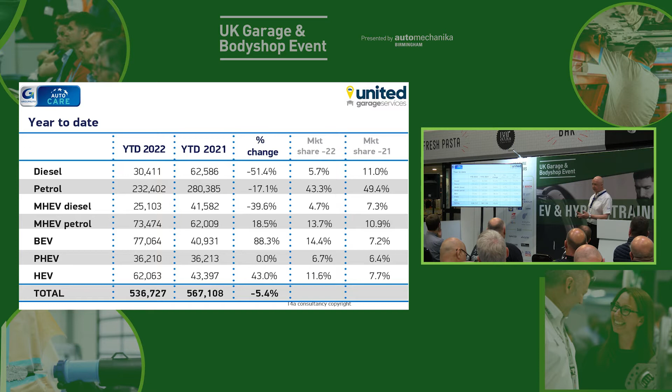This is a fundamental change to the entire industry, and a lot of people may not make it. Looking at some car sales in the UK, this is the latest month, ending May. Diesel sales are down 50% on the month - they now only represent 5% of all new cars registered. Whereas EV is now up 88%, and 15% of all cars registered are now just purely electric vehicles. That is a fundamental change, and you can see how that will probably continue to accelerate as time goes forward.

Norway, as you may know, is going to ban the sales of combustion vehicles from 2025, the first country within Europe to do so. A lot of other European countries are going to do it in 2027, and the majority, along with ourselves, are going to do it in 2030. But if you look at Norway, we can use them as a gauge of what's happening, and you can see the decline in the various combustion vehicles. The black line is diesels, and you can see that's collapsed quite dramatically down to pretty much zero, and if you look at our analogy, we're not far behind that really. The white line is the collapse in petrol combustion vehicles, and I think we will see that in the coming years in the UK market.

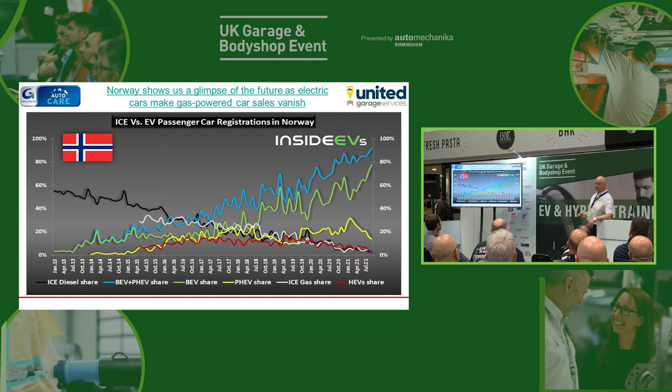Interestingly, the red line is hybrids. Now again, like most European countries, hybrids will be banned along with combustion vehicle bans as well, so 2025, 2027 or 2030, and you can see that market's completely collapsed in Norway too. So straight away with that, no disrespect to them, but you think to yourself, what is the market for Toyota in Norway now? And the answer is they don't have one. Someone like Toyota, one of the largest vehicle manufacturers in the world, actually don't have a market in Norway.

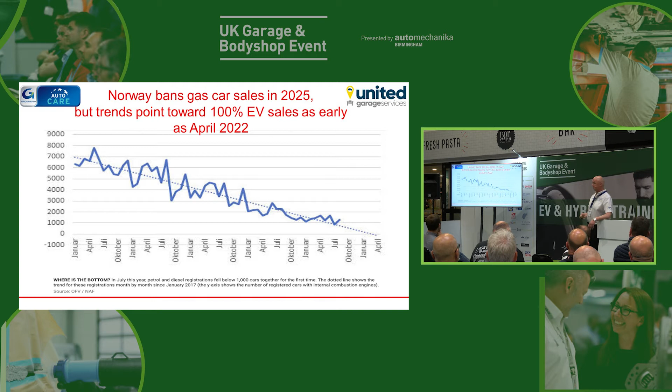Even though the actual ban by the government will be 2025, the reality is they're fast approaching it now. The prediction is, as we speak, they may have actually hit the point where they are no longer selling any new combustion vehicles. So it could be 2.5 years ahead of the actual date, just through natural progression. Things are moving very, very fast.

A lot of companies are going into the EV route for political reasons, environmental reasons, and obviously tax benefits. As an example, Asda have all now gone to electric vehicles and will change the fleet entirely. I'm sure other companies are looking at it as well. So if you are involved in any fleet work, bear that in mind. You may not have to wait for your customers to get EV vehicles - it may be a big fleet contract that could go to EV very quickly.

Bridgestone, we do some training for them, and they've done a survey through YouGov, and of all their customers, 67% said they're going to go EV. So nearly 7 out of 10 of their customers, of a 2,000 survey poll, said they're going to go EV. And the other thing that's interesting is about 50% want more information.

So you as a garage owner or a business owner, you need to know this so you can convey that to your customers. If nothing else, just give them an understanding that you do know what's happening out there, rather than just saying 'well, I don't know really.' You actually know what's happening and what is the reality, what is the truth. Because there are so many misconceptions and misunderstandings about what actually is going on with EVs themselves.

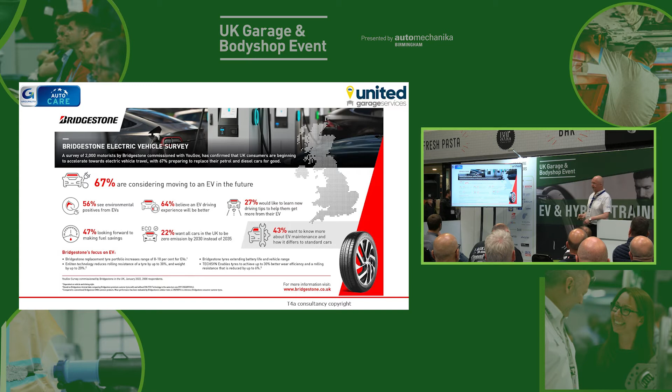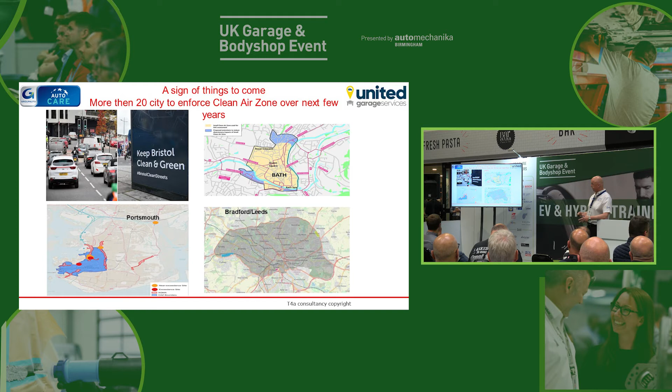Obviously, every city around the country now is getting some sort of emission zone. Bristol, Bath, Portsmouth, Bradford, Birmingham, London - we've got emission zones coming around. I think there's over 20 cities that are going to have some sort of emission zone in the next year or so. Only this week, Edinburgh, Glasgow, Dundee, several Scottish cities have put in emission zones. So that will continue to roll, and it will continue to have an impact on your customers and what cars they look for in the future.

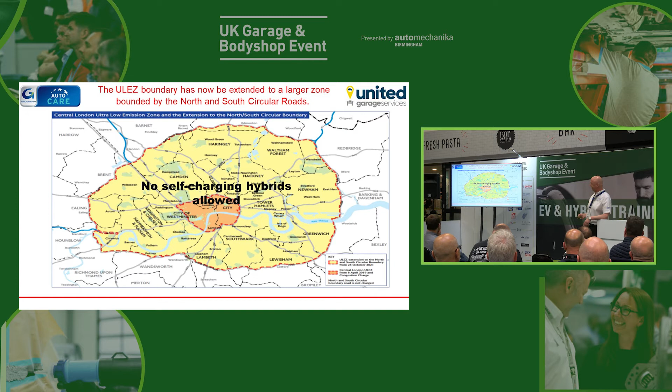Obviously, London, we've now got emission zones and congestion zones as well. If you've got a non-compliant vehicle, to get into the centre part now will cost you the best part of £30 a day, every day. Obviously, no hybrids now, so even a ubiquitous Prius has got to pay to get in the middle bit. The only vehicles in that orange section, of course, are just EVs.

As an industry, I think possibly we've taken our eye off this subject. Obviously, we're aware of Euro 4, Euro 5, and of course Euro 6. And then the EV thing seems to have muddied the water. But in the background, we still have stuff going on, and that is Euro 7.

Euro 7 will start from 2025. Now, I know we've left Europe, but we are still going to continue with the same emission targets just to make selling vehicles that much easier within the UK. So Euro 7 is a thing. The problem with Euro 7 is the requirements to meet it. Now, it has almost been finalised, and those emission standards are unbelievable. We'll have a little brief look at them in a moment.

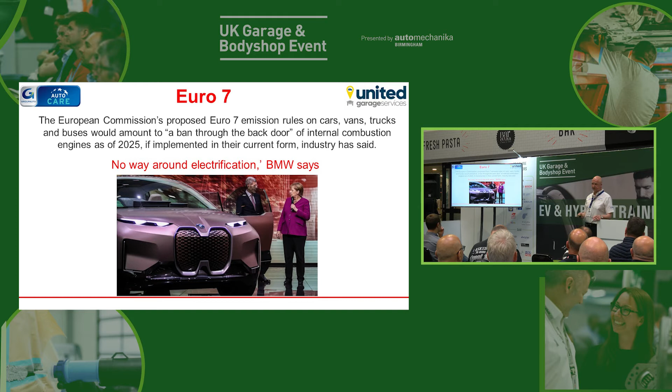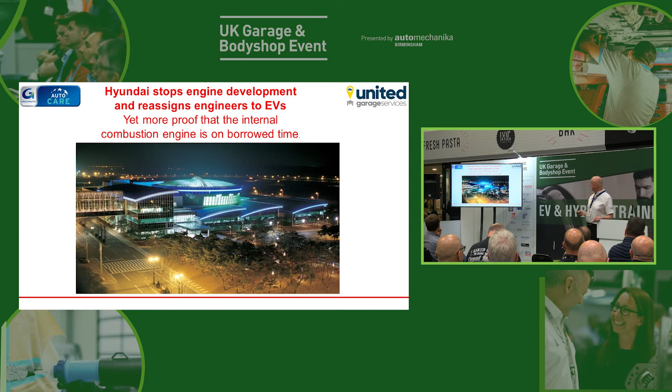But basically, a lot of vehicle manufacturers are of the conclusion that effectively Euro 7 is electrification through the back door. That's what BMW say - they say to meet Euro 7, you might as well just go electric, because that will be easier than meeting Euro 7. Hyundai have stopped all combustion development for Europe because of Euro 7. Nissan have stopped all combustion development because of Euro 7. So Euro 7 is a big, big problem that I think, again, we've not acknowledged the significance of.

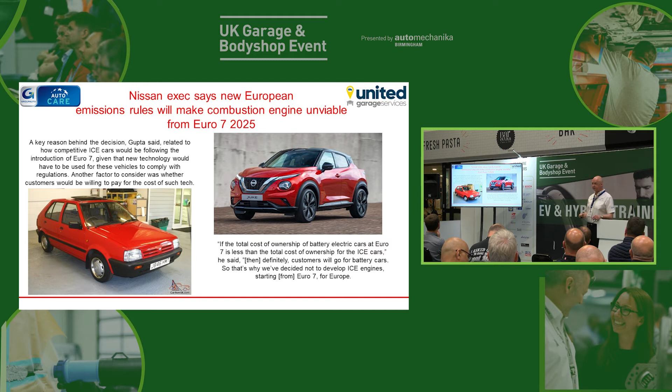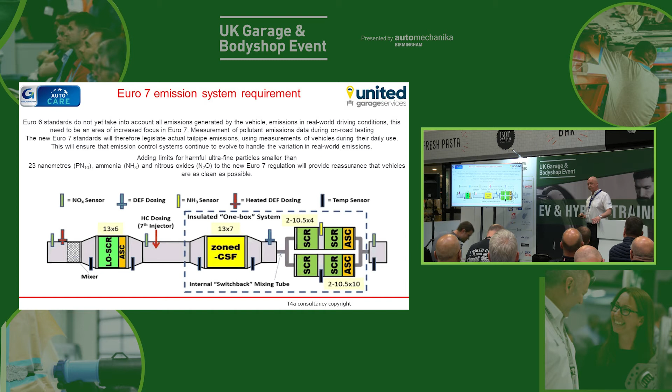From a manufacturing perspective, the biggest issue is the vehicle manufacturer will have to guarantee that for 150,000 miles, which then makes the car uneconomic. And that's what they're saying - yes, it is possible we may be able to meet Euro 7, but at what cost, and is it worth it? The conclusion is, it's not. So most vehicle manufacturers, which I'm sure you've seen recently, are launching their last combustion vehicles as we speak, which will remain Euro 6, and they can sell that vehicle for about 18 months after the 2025 date, but only as a Euro 6 vehicle. They just won't bother trying to do Euro 7.

Obviously time has been spent by my associate, Mr. Denton, about the requirements for electric vehicle training. I won't bore you with too much detail on that because of time, but interestingly, this has started this year.

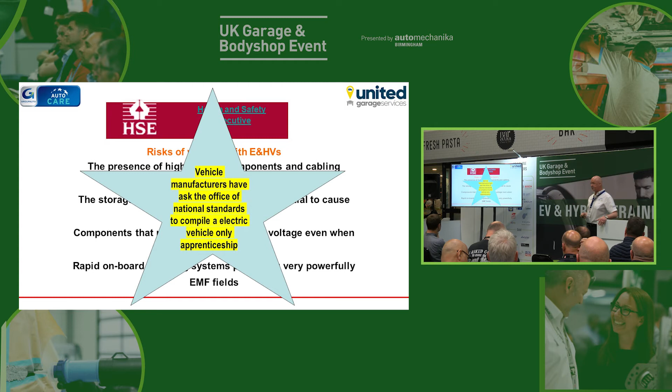Vehicle manufacturers are now providing electric vehicle only apprenticeships. We've seen the adverts running in London now. So vehicle manufacturers have concluded they do not need any more mechanically qualified technicians. They're going for electric vehicle only technicians. If nothing else tells you about changing times, that should. In their opinion, they've got enough mechanical technicians to cover what they need, but what they need in abundance are just pure EV technicians.

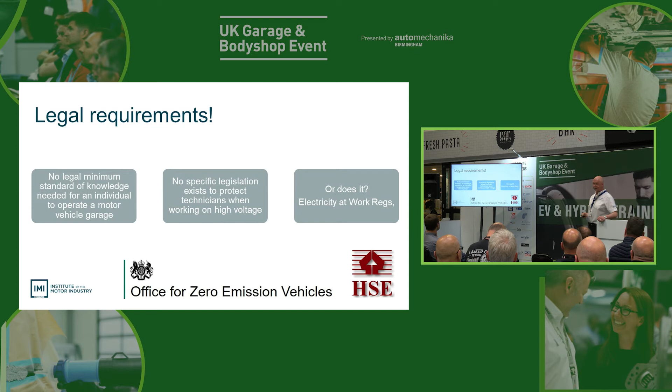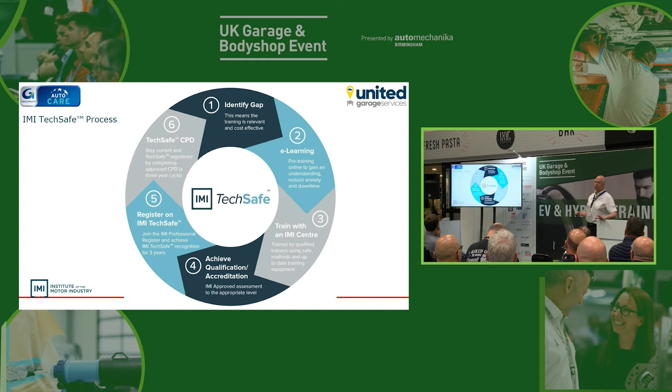Obviously, we know there's a requirement through the Electricity at Work Regulations, so there is a legal requirement, if we've not had time to discuss that. Once that's all completed, there is a further requirement to maintain that qualification, known as TechSafe, a bit like the Corgi gas register, that sort of thing, but we can discuss that at a later stage.

Looking at a few facts and fiction. Obviously our vehicles have got a 12-volt battery, and you know that can be an easy thing - I don't need to be qualified to change a 12-volt battery, I can just change it. First of all, you might see that our 12-volt batteries are recharged from what's known as a DC to DC converter, which receives its power from the main high-voltage battery. So there is a health and safety risk with that.

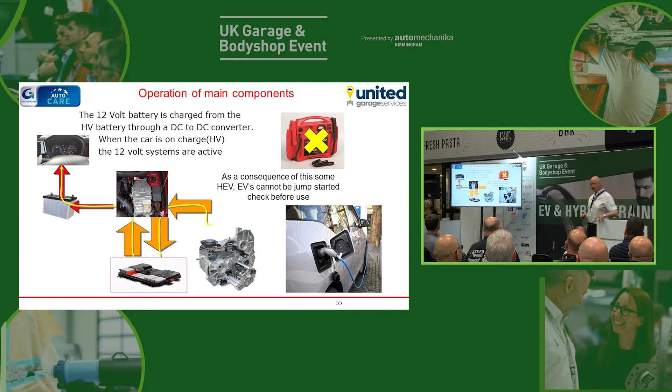But vehicle manufacturers are looking for the next game. So what have we done? Hyundai and Kia - you've now got no 12-volt battery anymore. The 12-volt battery is gone, and what you've got is a proportion of the high-voltage battery acting as the 12-volt battery. So to replace the 12-volt battery on that vehicle, what's got to come out? The main high-voltage battery. So whatever you do, don't try and jump-start that car, because it can be awfully expensive.

And don't get the apprentice to try and find the 12-volt battery - that's not very nice, is it? Because they'll be on it all day and still won't find it. But that just shows you things are changing and how quick things are changing.

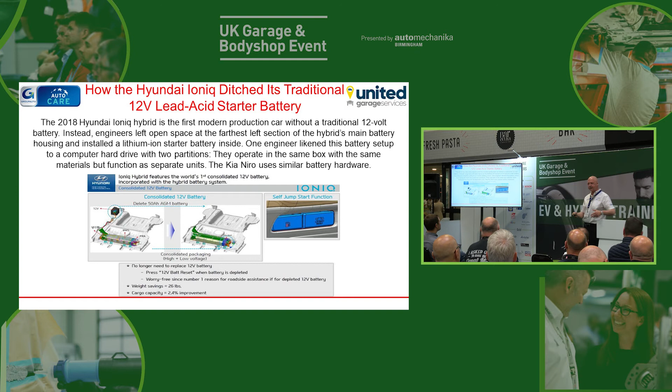Another thing, no disrespect, but it's something I came across because I had to do some help. Obviously companies are now concerned about the exposure they're going to put their employees against. Someone like Kwik Fit - I don't know if you can see it from this distance, but I can read it to you. This was on my old Outlander plug-in hybrid, and it says Kwik Fit do have batteries for an Outlander, but below it says we currently cannot fit batteries to an EV or plug-in hybrid vehicle.

That is someone like Kwik Fit telling you on their own worldwide website that we cannot fit, we are not allowed at the moment, or are unable to fit your 12-volt battery. What confidence would that give your customer if you said, yeah, I can work on a car, but I can't change the 12-volt battery? Anybody's going to think, well, that's pretty straightforward - we know it's not, but you'd expect they could do it. But they can't. They cannot replace a 12-volt battery on an EV or plug-in hybrid vehicle.

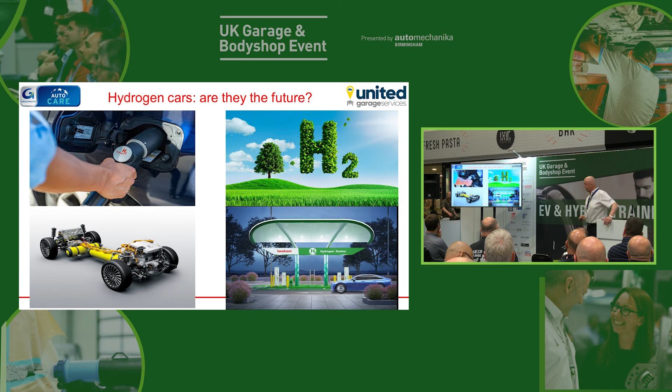Again, is hydrogen going to be the future? A few people have come on our stand already and said, well, it won't be battery electric, it'll be hydrogen. We get that all the time, and I've put a few things up there. So is hydrogen going to be the future? We've all got our own opinion, but let's look at the facts.

I think this is where we get a little confused again. Hydrogen may well be the most abundant element in the universe, but on planet Earth, we don't have any. All the hydrogen on planet Earth is contained within something else, either the oceans or hydrocarbon fuel. There's no ready available source of hydrogen we can tap into - we have to manufacture it.

Why is the reason we've only got 5% made through electrolysis? One simple fact: economy. To make 1 kilo of hydrogen from water, electrolyzing it, will require 49 kilowatt hours of electricity. That 1 kilo of hydrogen will get you about 60 odd miles. 49 kilowatts will get you 250.

So basically, you can go home and do the research, but when you're looking at energy, what you want to look at is something known as EROI, energy return on investment. How much energy you've put in to what you're going to get out. Clearly, all energy wants a positive. You put 1 in, you get 10 out. That is how most energy works, some with a higher figure than others.

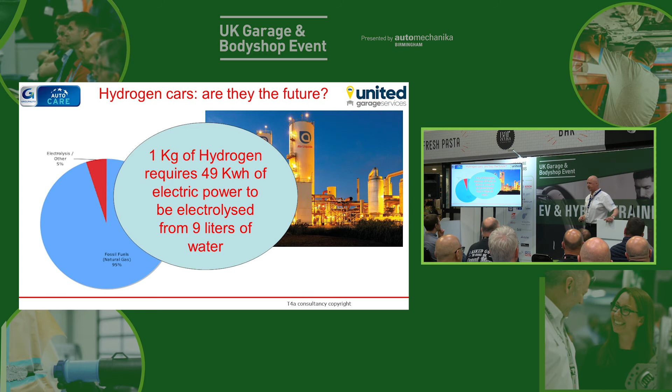I think to some degree, when I hear people talk about it, I think they just think hydrogen fuel cell sounds sexy. It sounds Buck Rogers, 21st century. A battery sounds like Benny Hill, Fred Flintstone, doesn't it? It's a milk float. Doesn't sound sexy. Hydrogen fuel cell sounds sexy. The mayor at Montpellier decided he was going to have a hydrogen bus service because it sounds sexy.

By the time he crunched the numbers, his hydrogen bus service would be 6 times dearer than an EV bus service. So guess what? He scrapped the hydrogen bus service and bought 54 electric buses.

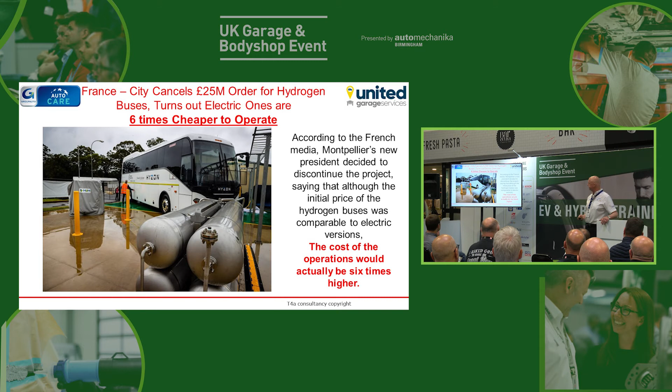We run the same 100 kilowatts through the national grid and charge an EV vehicle. We've now got 73 kilowatts at the wheel of the vehicle. A 3-to-1 advantage. When is that hydrogen ever going to get near that EV efficiency? Never. The answer is never.

And that's why currently the only car you can buy... Honda's binned their Clarity, so Honda are out. Hyundai has suspended until further notice their development of the Nexo. And the only one, of course, is Toyota with their Mirai. But in order to have a Mirai, you have to live inside the M25 because it's the only place you've got hydrogen stations.

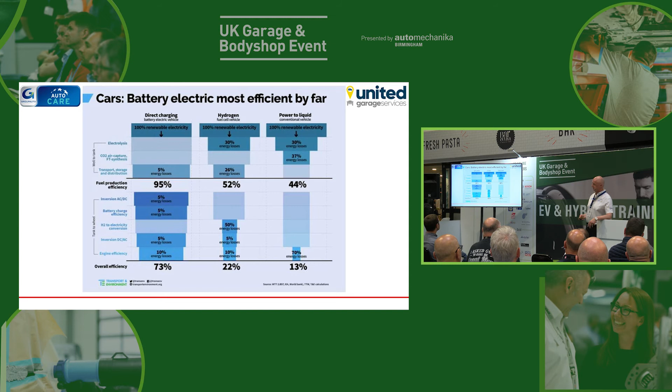Charging stations, courtesy of ZapMap. Back in 2016, which was the first year I started running electric vehicles, there were 6,500 stations. The majority of those stations would only have one cable. So that was 6,500 stations, and it was almost certainly 6,500 leads, or 6,500 charging points.

That was 2016. If we now come on 6 years, how many do you reckon there are now? Most of those stations have got 2 leads now. So the change in the charging structure network has been astronomical.

Unless you do it, you won't realise it. I go to Scotland, I go to Northern Ireland, I go all around the UK, 20, 30,000 miles a year. I've never, ever, ever had a problem. And when I read in the press that somebody takes 9 hours to do 100 miles in a car, you think, well, they're just an idiot.

There's nothing wrong with it, they just don't know what they're doing, because it's almost impossible to have that problem. I drove yesterday, I was teaching in Whitstable, and I had to come up here to put the car in the stand. I left Whitstable at 3:30 with a fully charged battery. I drove all the way from Whitstable to the NEC, 190 miles, and I've still got 130 left. How's that a problem? How is that a problem?

Remember, there are over 400,000 chargers at home, hotels, and destination points as well. People say you spend a lot of time charging, but in fact I don't. The majority of the time I'm charging, I'm asleep or at the bar, one or the other. I'm certainly not waiting for the car to charge.

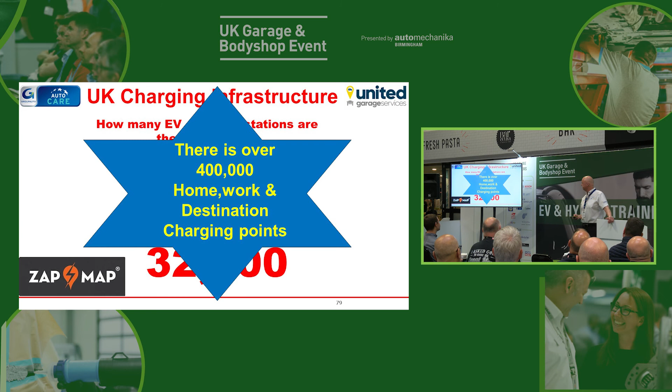I'm just conscious of my time. Obviously, if you can't charge because you don't have a drive, what could you do? First of all, how many people own a car that can't charge outside? The actual percentage is 20%, so it's only 1 in 5. Not an enormous quantity, really, unless it's you, of course.

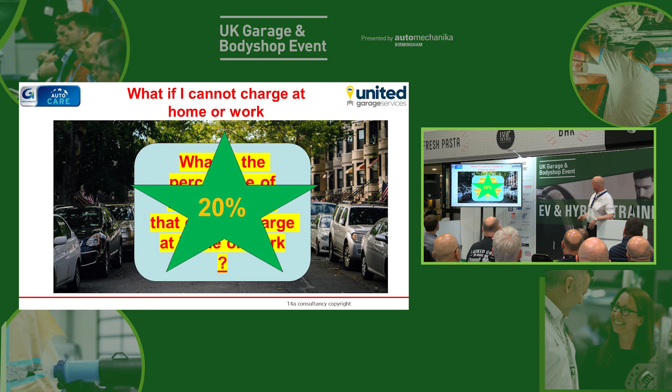But you've got supermarkets, IKEA, lampposts, and even the e-gully, which is something Oxford Council's doing. They will install that outside your house, so you can charge your car outside as an e-gully.

And of course, from a business point of view, they don't have to buy the fuel first, do they? When you go to a petrol station, the first thing you've got to do is invest £50,000 and fill the tanks up with fuel. There, you pay for it when the customer fills their car up. So it's got a much better business proposal.

So I'm coming back from teaching in Cornwall, about 6:30 in the evening, and I pull up there, and I'm thinking to myself, why are they all empty? Are they all broken? It's the first time I've ever seen them empty. But I'm thinking, well, just one of those days. So I pulled up there, quite surprised that they're all empty.